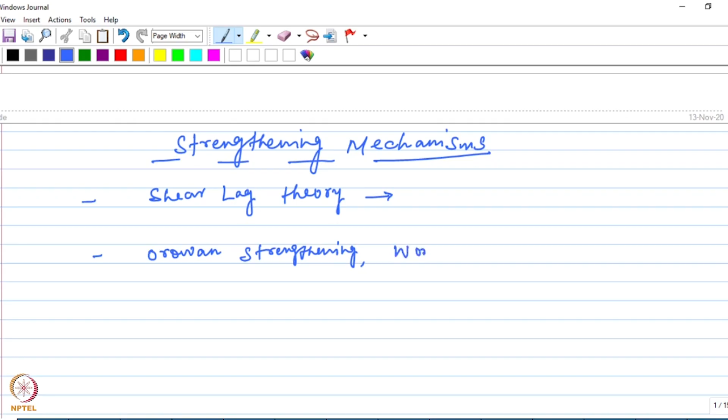And with regard to this we have talked about the shear lag model or shear lag theory, which talks about the transfer of load to the stronger reinforcement via the interface. And then we talked about the dislocation mechanisms such as Orowan strengthening, work hardening, grain refinement strengthening, and strengthening due to mismatch in the thermal expansion coefficient.

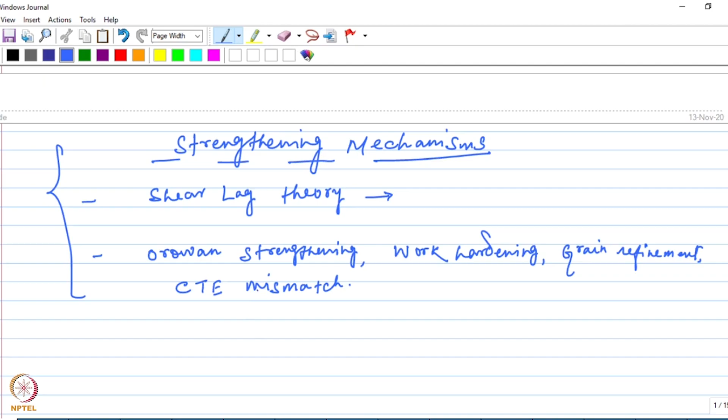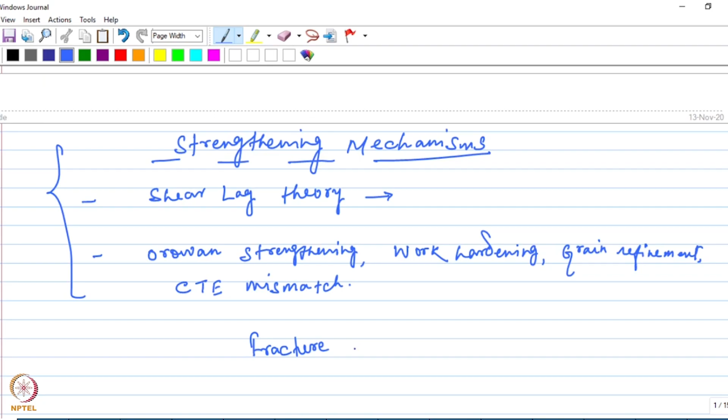Right, so all these mechanisms will ensure that the strength of a composite is higher compared to the unreinforced matrix. Okay, so now that we have learned about the strengthening mechanisms, it is time for us to have a look at the fracture behavior of MMCs and see how the fracture of the composite differs from the matrix material, and what are the different aspects of fracture. So this will be the topic of discussion for this particular class: fracture of metal matrix composites.

So we are going to start with again the fiber reinforced composites. So when you talk about the fracture behavior of a fiber reinforced composite which is loaded in a particular direction, let's say in the direction parallel to the fibers, then you need to also consider how the matrix behaves as it is loaded in the presence of the fibers.

So you need to consider the matrix properties as well, particularly the ductility. Because the material flow in the matrix will be decided by the ductility - how far it can go through the plastic deformation and accommodate it. That is what the ductility talks about, right? So for a ductile matrix, the ultimate strength of the composite material is relatively insensitive to the matrix behavior. That is the first point to note.

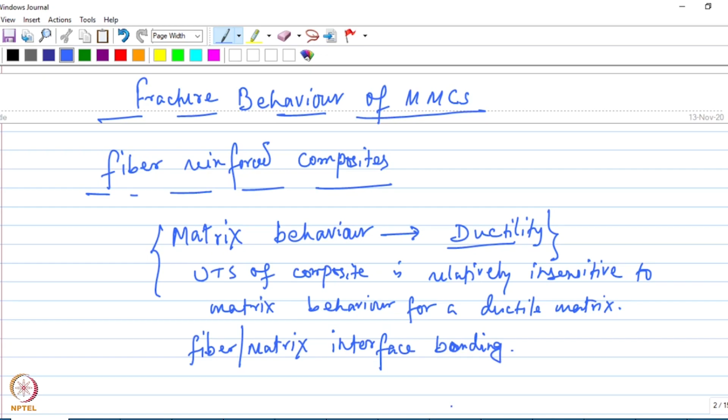So we will make distinction between two cases with regard to the ductility of the matrix. One is when the matrix is quite ductile, and another when it is a stronger matrix and the ductility is relatively lower. Okay, so for a ductile matrix, for example if you talk about pure aluminum matrices, then you can say that the fibers can fracture before the global yield of the matrix. So before the matrix starts to yield, you can expect the fibers to fracture when the composite is loaded, when the matrix is ductile.

So now once the fibers are broken, then the crack will propagate along the composite, and this crack propagation would depend on what kind of interface bonding is there between the fiber and the matrix.

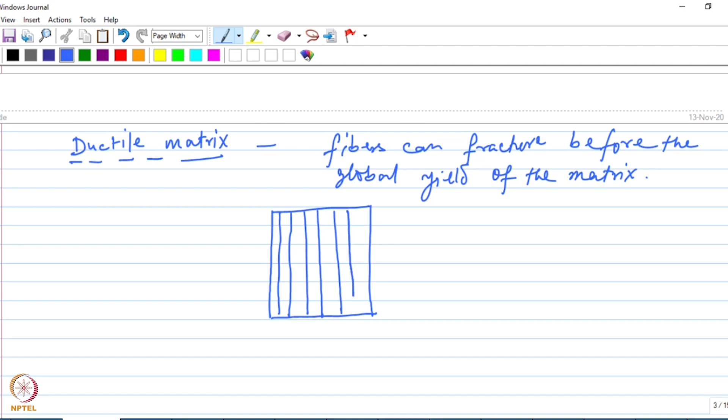So let us consider a fiber reinforced composite like this. So what we are saying is the fibers will be broken. The fiber will fracture first, and how this crack will propagate depends on the bonding at the interface. So this interface, how it behaves, depending on that, the propagation of the crack would vary. So again here also we can make distinction between two cases: one when the interface bonding is strong, and the other when the interface is weak.

Okay, so here once the fibers begin to fail, local matrix will yield at the broken fiber ends, and this yielding of the matrix at the broken ends of the fibers will relax the stresses and will prevent the crack from propagating to the adjacent fibers. Okay, so what we are saying is once the matrix yielding starts, it will basically lead to stress relaxation, and this will have a blunting effect on the crack tip, right? So here at the end of the fibers, at the broken end, it will basically relax the stress and blunt the crack.

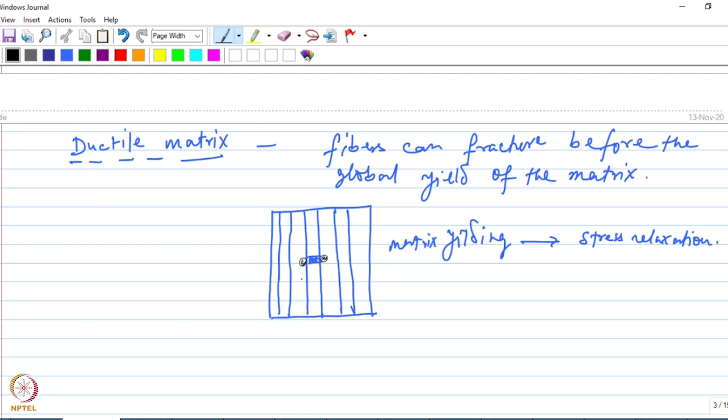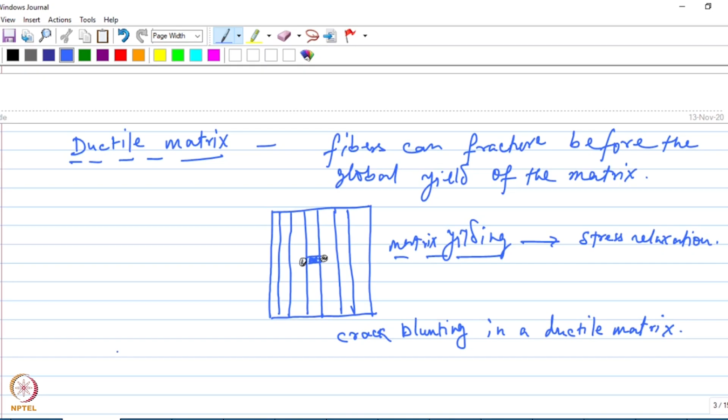And this will prevent the crack from propagating to the adjacent fibers. So when you have a scenario like this, matrix yielding in a ductile matrix material, it can have a relaxation effect on the crack, and crack propagation will be prevented. So this is one scenario where the matrix is soft and ductile.

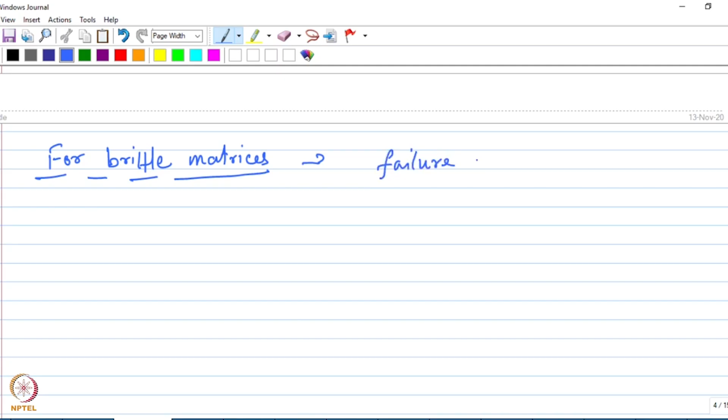Now let us move to another case where the ductility is comparatively lower, for brittle matrices. For this kind of material, the failure of a single fiber may propagate through the entire composite. It may lead to catastrophic failure, because once the fracture starts in a particular fiber, it will quickly propagate to the adjacent one, and the crack will quickly propagate across the entire composite material.

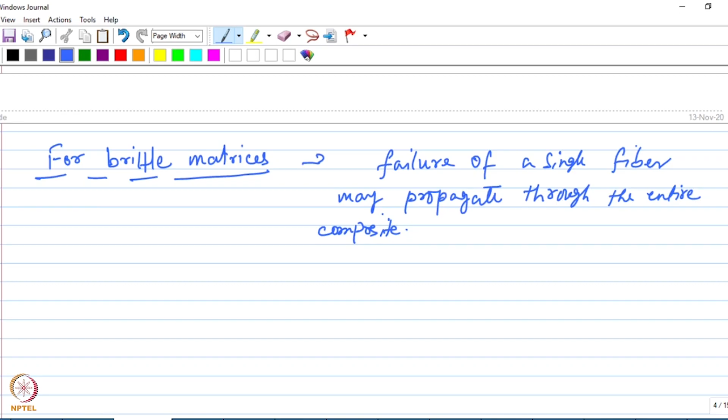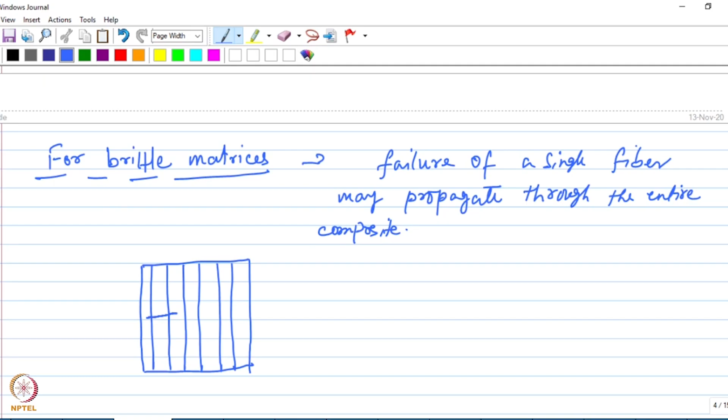So the catastrophic failure or fracture of the composite can be prevented only when the fiber-matrix interface is weak. So this scenario, if you see, in terms of again looking at the fibers, once the fracture of a fiber starts, it will propagate to the next one.

And as I said, the catastrophic propagation of the crack can only be prevented if some relaxation is developed at the crack tip. Only when the stresses can be relaxed can this kind of catastrophic propagation of the crack be prevented. In this case, when the matrix is brittle, that relaxation can only be developed through the interface if the bonding at the interface is weak. This will relax the fibers and prevent the catastrophic crack growth.

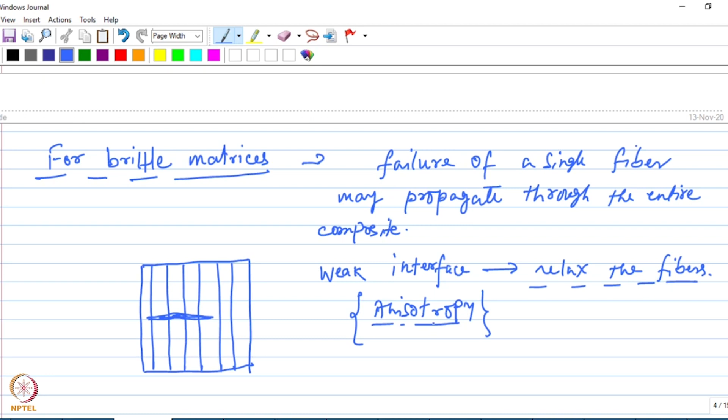And this is also one of the reasons for the anisotropy that you see in fiber reinforced composites. Because how this interface will behave from fiber to fiber might change, and it may also differ when you change the loading direction. So that is how this interface behavior can lead to anisotropy in fiber reinforced composites.

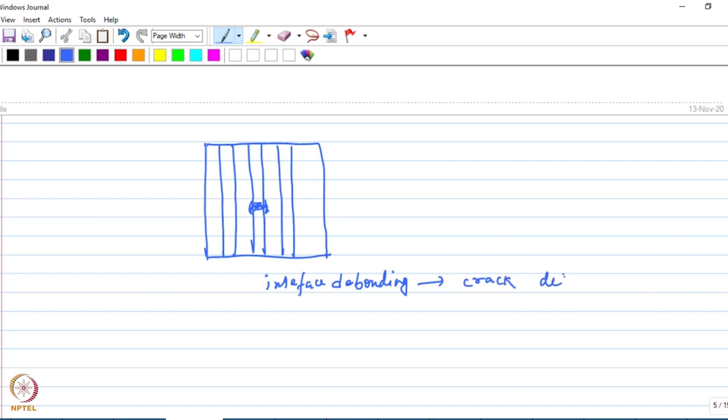So when the interface relaxes due to the weak bonding, it can be represented in this manner. Basically what we are saying is, when the fiber is fractured, it can be relaxed if there is debonding at the interface, which will lead to crack deflection and prevent catastrophic fracture.

So now let us consider the fracture of a single fiber and how that propagates to the adjacent fibers, leading to the complete fracture of the composite.

So the load carried by a particular fiber has to be distributed to the adjacent fibers before the fiber fractures. Load redistribution is needed before the fiber fractures. And therefore the load has to be transferred to the adjacent fibers, and then those fibers will carry the load.

As you continue the deformation of the composite, these fibers will now start to break, the fibers which now carry the load. As you continue to increase the load on the composite material, the fibers will break one by one as the load is redistributed and transferred to the adjacent fibers. So this sequential fracture of the fibers will depend on the degree of coupling between the fibers and the matrix.

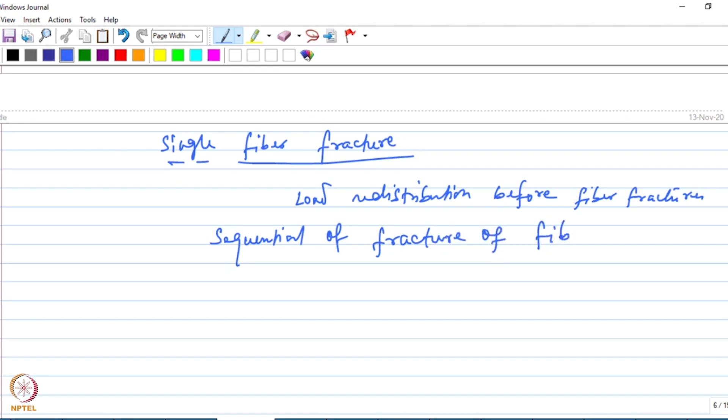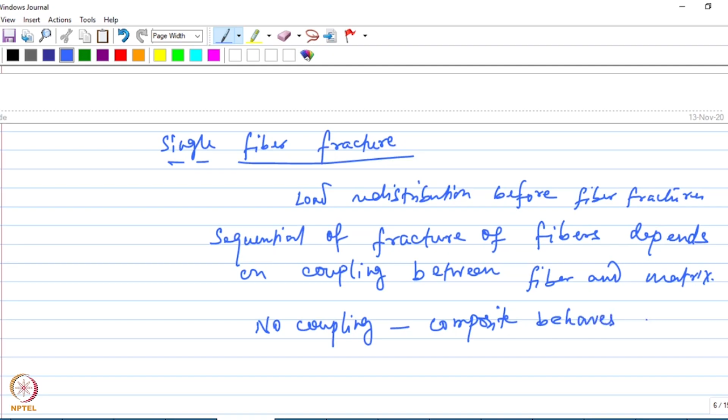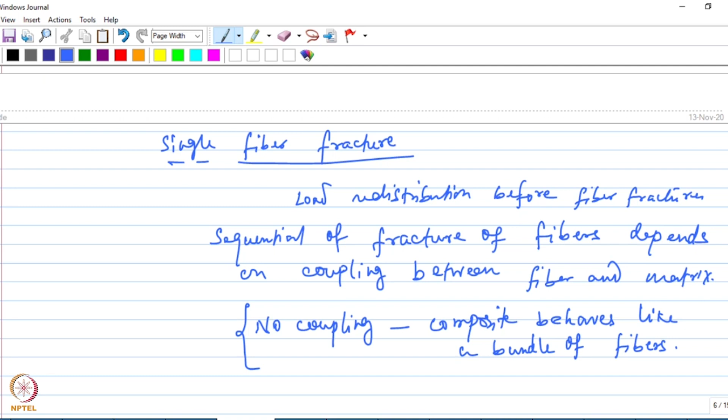This again boils down to the bonding between the fibers and the matrix. So it is not difficult to understand that when there is no coupling, the composite under load will behave like a bundle of fibers, because the matrix has no role to play since there is no coupling between the fibers and the matrix. On the other hand, when there is strong coupling, the deformation will take place in the manner we discussed before, depending on different parameters of the matrix material and the interface bonding.

Now, let us consider the growth of large cracks during tensile loading in a direction parallel to the fibers.

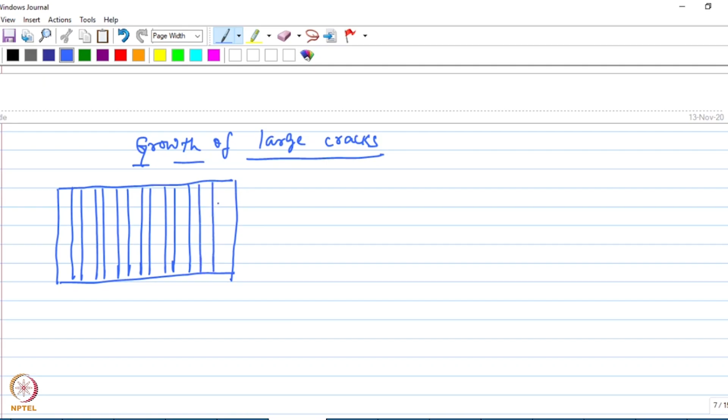So let's say this is a fiber reinforced composite which is loaded in tension in a direction parallel to the fibers. Now we need to understand the growth of large cracks in this case. For the crack to propagate, failure must occur in both the fibers as well as the matrix.

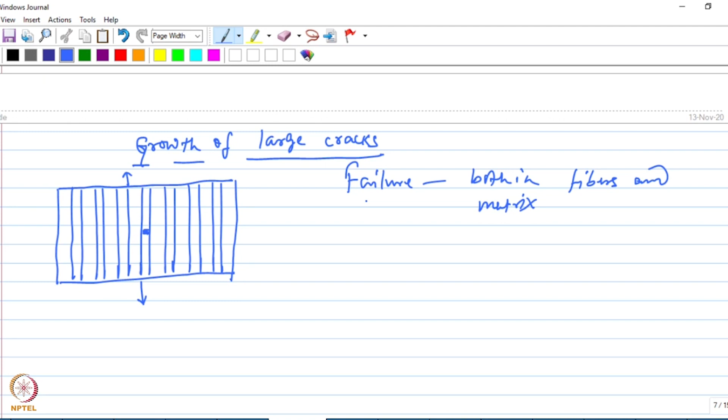So you have a crack in the fibers and you also have a matrix crack. The matrix crack propagates behind the fiber crack front, meaning the matrix crack will follow the fiber crack. If this is the crack in the matrix and this is the crack in the fiber, this is how the matrix crack will be with respect to the crack in the fiber. So the propagation occurs in that manner, with the matrix crack propagating behind the fiber crack front, and here the crack front is planar.

And this occurs when the interfacial bonding is strong. On the other hand, if the interface is weak, then debonding at the interface will lead to crack blunting, as we have seen before.

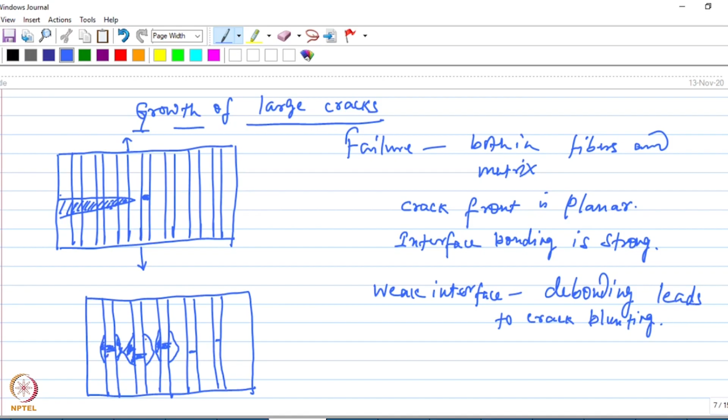So due to the weak interface, there is debonding at the interface, which will lead to relaxation and blunting of the crack. So there is a debonding at the interface, which leads to crack relaxation or crack blunting. In this case, the matrix crack and the crack in the fiber are not really in the same plane. So therefore here the fracture is non-planar, unlike the previous case where it was a planar fracture or planar crack front. In this case, the matrix crack and the fiber crack are not necessarily in the same plane, and therefore it is a non-planar type of fracture.

So to quickly summarize this fracture behavior of fiber reinforced composites, we can say that when you talk about the entire fracture of the composite material, you need to take into account the matrix behavior and the fiber matrix interface. Depending on that, the crack will behave or propagate differently. And matrix properties such as the ductility of the matrix will have a role to play on the propagation of the crack.

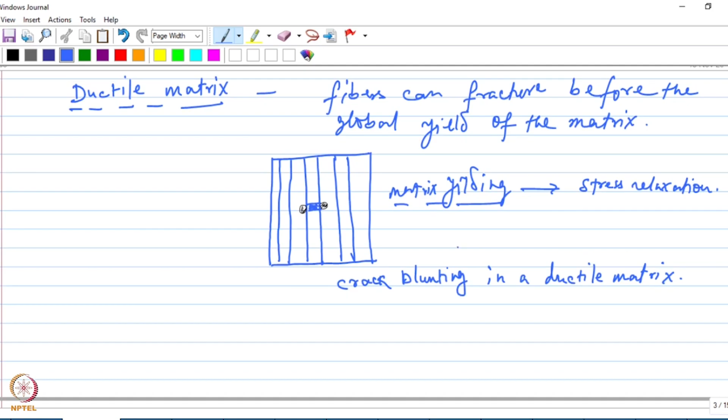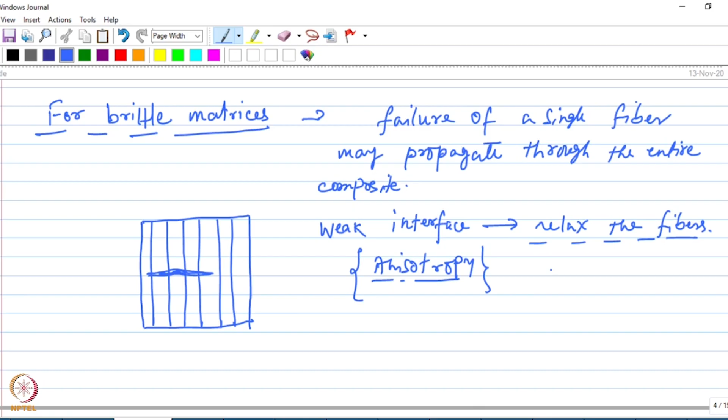When it is a ductile matrix, the yielding of the matrix material at the broken fiber ends leads to stress relaxation, and that will prevent the propagation of the crack. On the other hand, when it is a brittle matrix, the crack can propagate from one fiber to the adjacent fiber, and catastrophic failure can only be prevented if there is a weak interface which leads to some kind of deflection of the crack due to the debonding at the interface.

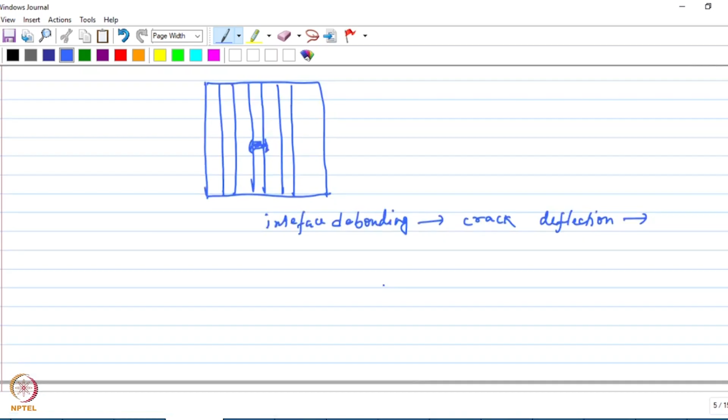And then we talked about the fracture of single fibers, as to how the fibers fail one by one when the composite is loaded, and this sequential fracture of fibers depends on the coupling between the fiber and the matrix. If there is no coupling, the entire composite will behave like a bundle of fibers, and on the other hand, when there is a strong coupling, the fracture behavior would depend on the interface bonding.

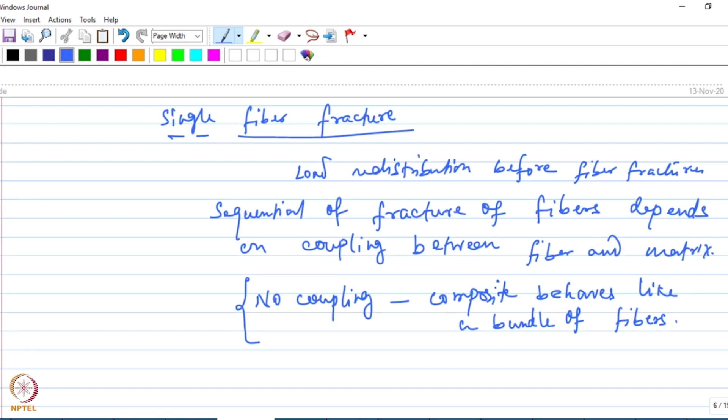And then we talked about growth of a large crack under a tensile load in the fiber direction. Here again, depending on the interface bonding, the fracture can be planar or non-planar. When the bonding is strong, it will be planar, and the matrix crack will follow the fiber crack, with these two cracks in the same plane. On the other hand, if it is a weak interface, debonding leads to crack blunting effects, and here the fracture of the fiber and the matrix are not necessarily in the same plane, so this will be a non-planar type of fracture.

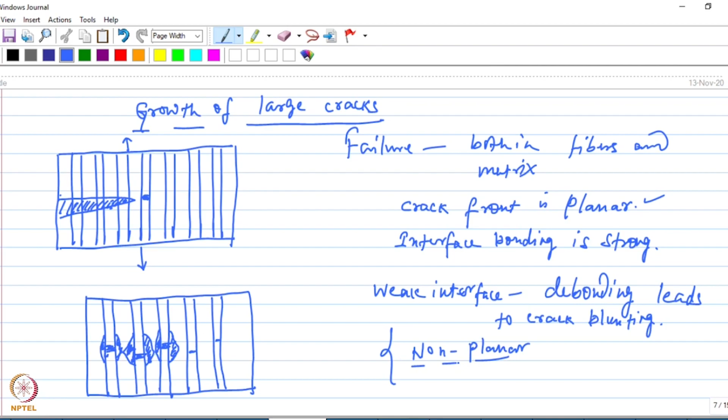And with that, we come to the end of this lecture. Thank you for watching.